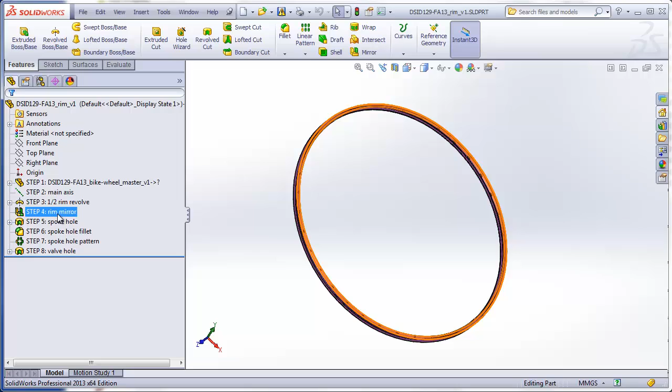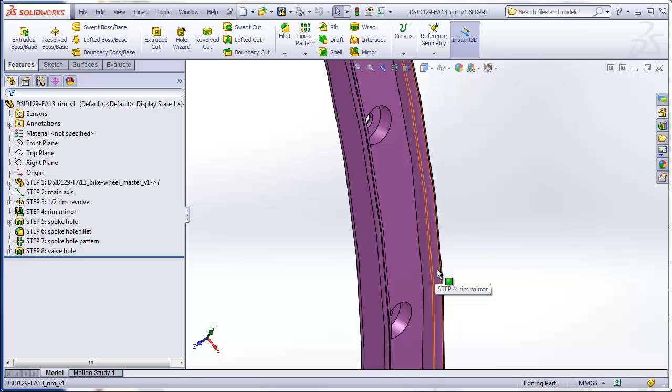The rim is just a revolve hoop that has a hole or series of holes in it, one for each spoke that will be going into the wheel assembly. It also has some details on the rim that capture or clinch the tire onto the rim so that it doesn't easily come off.

Taking a look at the rim in the wheel assembly, the spokes are evenly spaced all around the perimeter of the rim, and there are as many holes in the rim as there are in the 2 flanges on the hub. This example here shows 36 spokes total, so there are 36 holes in the rim, and we also have a hole in the rim to allow the valve stem to pass through.

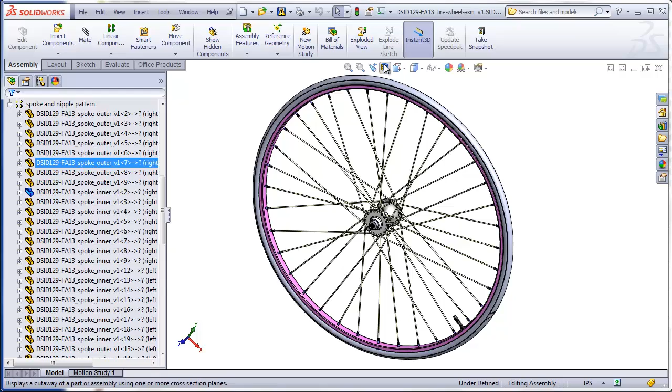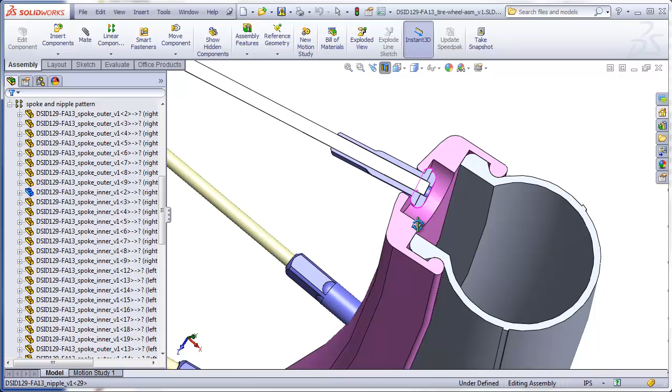If we take a cross section of the assembly, you can see the cross section of the rim here in purple. This is the detail that clinches on to the tire. This is the hole in the rim that allows the spoke nut or nipple to pass through, and this is what anchors the spoke into the rim. Then we have a slightly bigger hole which is used to create clearance for the anchor end of the nipple.

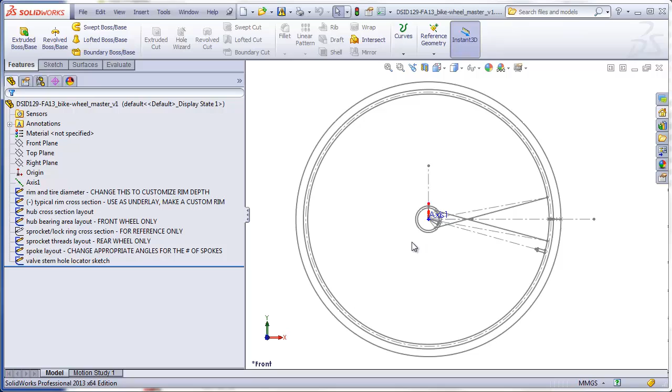Even though you are going to be designing a custom rim, one set of features you will not be altering are these details that clinch onto the tire and this back wall that the tire seats against. You are going to be building this model using the master model technique, and you will be using the same master model that you use for your other parts such as the hub and the axle. Before you started this process, you should have decided how many spokes were going to be in your wheel and what type of rim you were going to have.

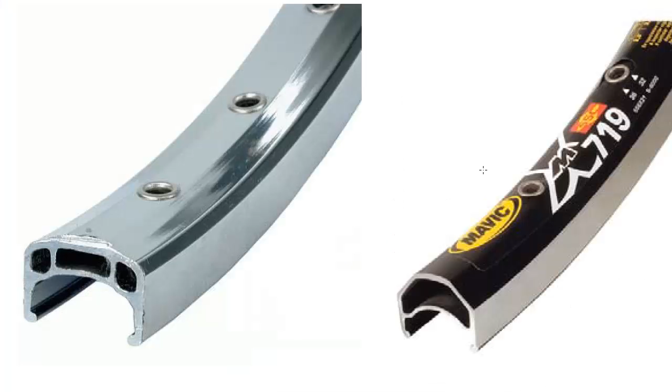Traditional older bike rims have a very boxy shape like this, or perhaps like this, and they are only about 11 or 12 millimeters tall in this dimension, perhaps 15 at the most. They also have a double wall section, as you see here and here. When we model our rim, we're just going to leave this filled in as a very thick wall.

The newer, more aerodynamic rims tend to have a deeper cross section, as much as 20 to 40 millimeters deep, and have an airfoil shaped cross section. Quite often, even though they have a curved airfoil cross section in this area, they will have vertical walls here and here where the brakes can engage. Often there's a little step right here to differentiate the area where the brakes engage, and the nice area here which is often anodized with some type of color.

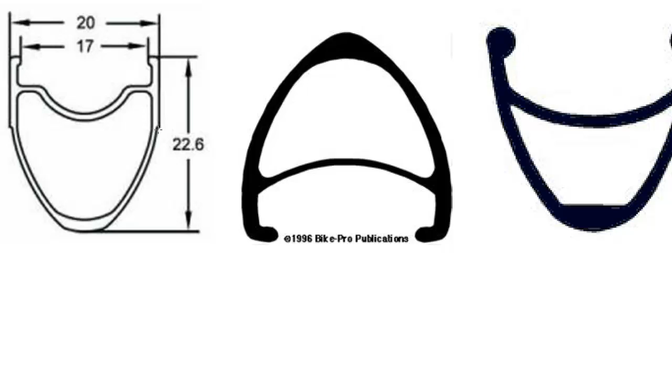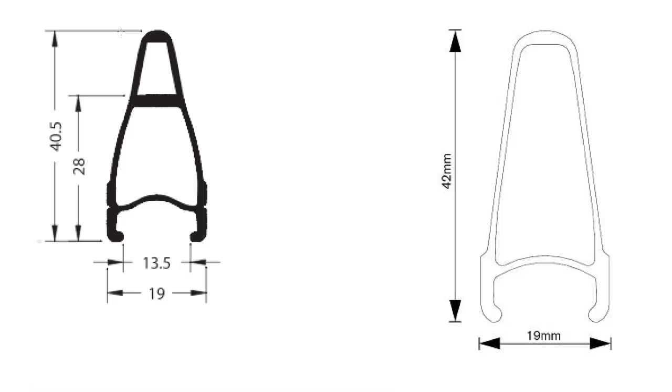At the extreme end of the range are arrow-shaped rims that have a 40 to 60 millimeter depth and get very narrow and tapered at the end. And again, you see that these often have flat sides for the brakes. Although I've seen ones that are 60, I think 40 would probably be the more practical limit for this project. Typically, the deeper the cross-section of the rim, the fewer the spokes that you need, because the rim becomes very stiff as it becomes very deep. However, for this project, the way I've constructed the models, 24 spokes is the fewest that we can use.

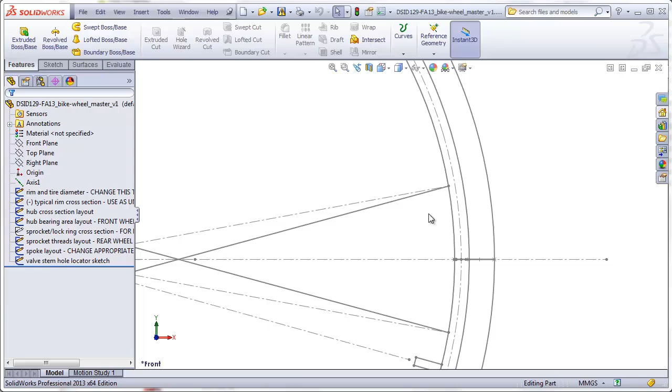Now, getting back to our master model, you have to have decided ahead of time whether you want a rim with boxy proportions, which are the dimensions represented in your current master model, or if you want a deeper aerodynamic rim. If you want a deeper aerodynamic rim, you want to go to the rim and tire diameter sketch and edit that, and change this rim depth, which is currently at 11 millimeters. I'm going to change my rim depth to about 35 millimeters. We can see how deep that rim is now compared to the tire.

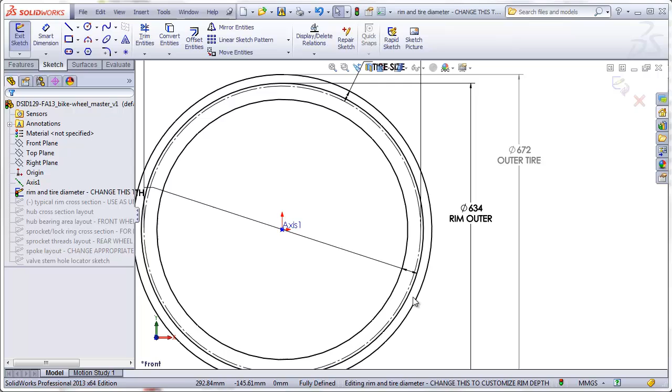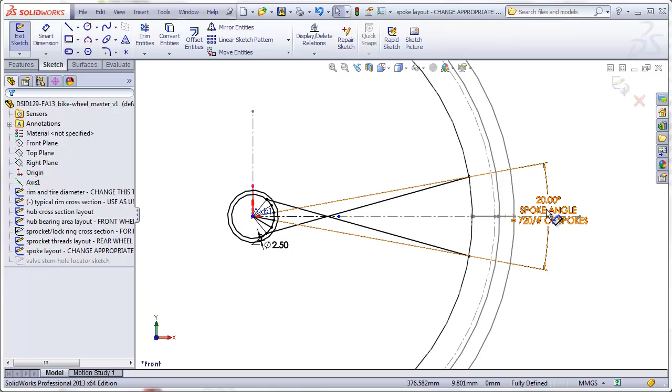And because I've got a deeper rim, I think I'll have fewer spokes as well. So I want to go into the spoke layout sketch and edit that, and I need to change this spoke angle. The spoke angle is equal to 720 divided by the total number of spokes. Editing this dimension, I'll type in 720 divided by 24 spokes. We see the spokes spread out quite a bit. And now I have a master model that's ready to be used in my rim.

If you already made some other parts for the wheel, such as the hub, you should have gone through this process first before making those parts, because that will affect the number of holes in the hub flanges. The next thing to do is create a new part.

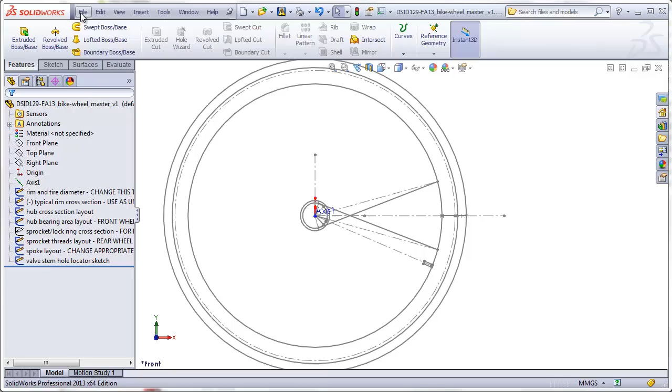And we might as well save this right now. Call this rim. And our first step in the process is to say insert part. We have to browse to our master file, which we find here. Open. Make sure that unabsorbed sketches is checked and check our green check mark.

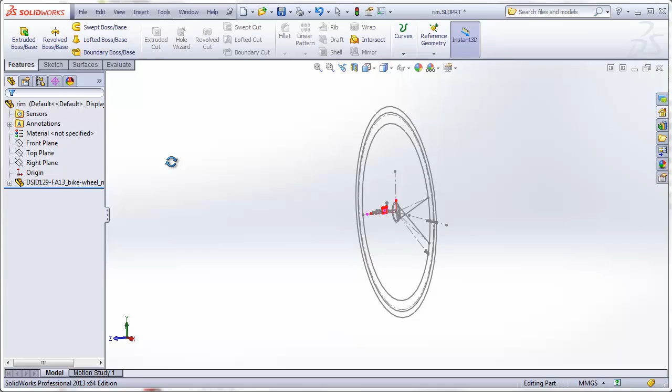And here we see our master file. We see that the rim depth has been updated on it. For step 2, I'm going to create a convenient axis that can be used for revolving. I'm going to have that go through the intersection of the top plane and the right plane.

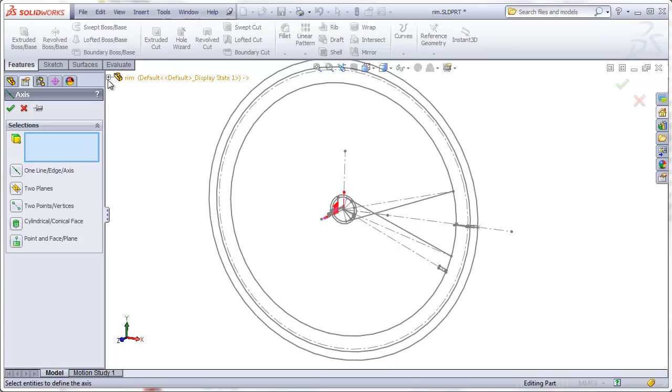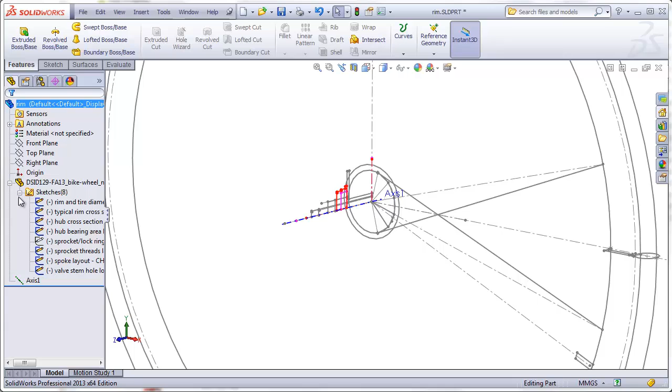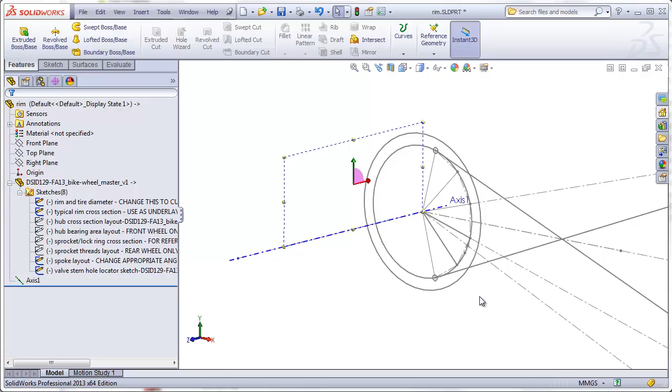And before I go any further, I'm going to get rid of some of the sketches that are not necessary to make this part. Clicking on the plus sign here, opening up the folder for my sketches. I don't need to have the hub cross section, the hub bearing area, the sprocket layout. That leaves me just 4 sketches that are related to the creation of the rim.

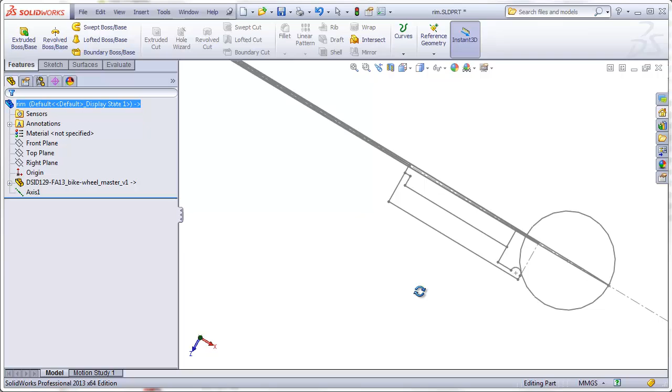Next step now is going to be to create 1/2 of the rim itself. Zooming in here, we see that when we changed the sketch for the depth of the rim, it automatically also updated the sketch that represents the cross section of the rim. So creating on our top plane a new sketch.

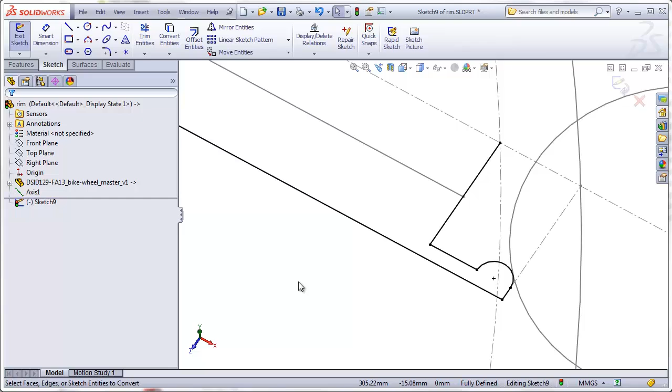I'm going to copy the details that must be in our sketch cross section, and these will be the details that clench the tire onto the rim. So using convert entities, I'll copy these items. And going up here, this is where the innermost part of the rim is located. The spoke passes through here. I'm going to copy this line as well.

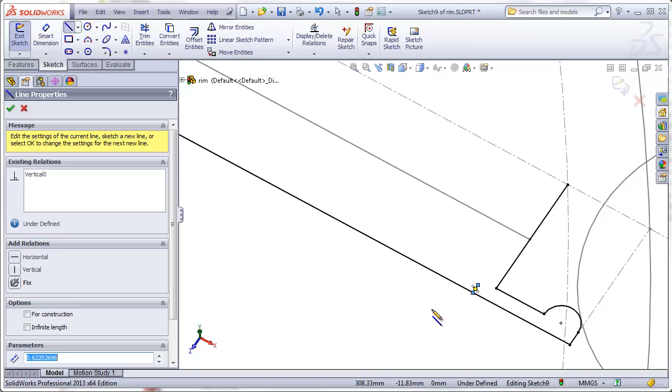But I want to make a more aerodynamic shaped rim. I want to put a little step here like you saw on the other examples, and then have this sort of arrow shape kind of coming up like this and wrapping around. So I'm going to add another line here. And add a spline. And I'll stop it right about here.

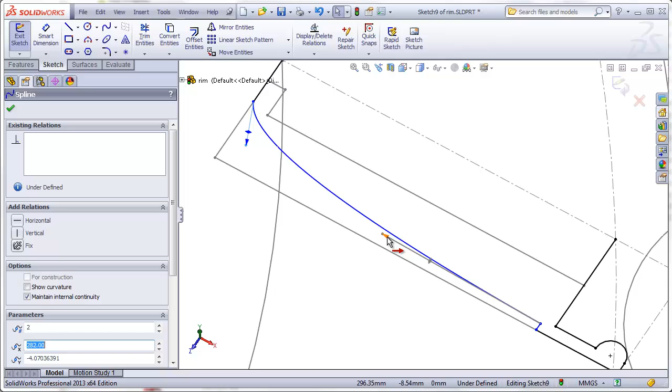Trim away the excess. And then start playing around with the spline here. I think I'll make this a horizontal relation. The step only needs to be about 1/2 millimeter at the most. I'll add a dimension here of about 10 millimeters, somewhat arbitrary.

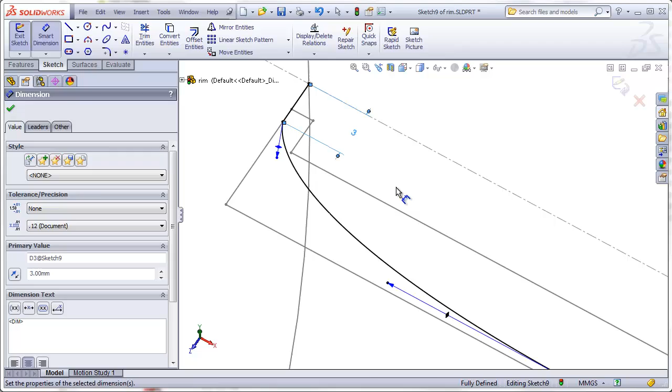And I want to have a little bit of a flat area here so that that hole passing through has a flat section to go through. So I'll make this about 3 millimeters, and I'll make this a vertical relation. Let's take a look at that directly. There's my aerodynamic shaped rim. I can maybe make this 2.

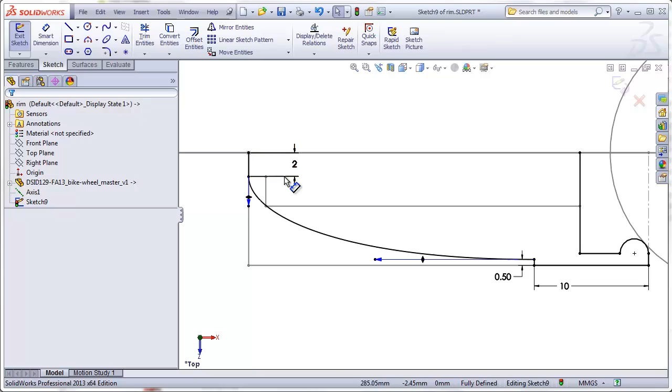This is the larger hole that's going to be going through to anchor the back of the spoke nut or nipple. So we want to make sure that this does not cut through. Otherwise, we need to make this hole go a little bit deeper, which might be acceptable. I'll bring this to here.

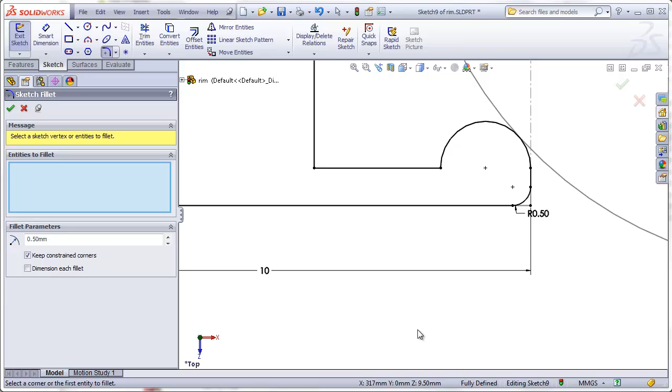And finally, I think I'll add a little fillet to this corner. That's too big, so we'll make that about 1/2 millimeter. That looks good. So this is the section we're going to revolve. There's one last thing we need, which is a line going across here to finish this closed off area.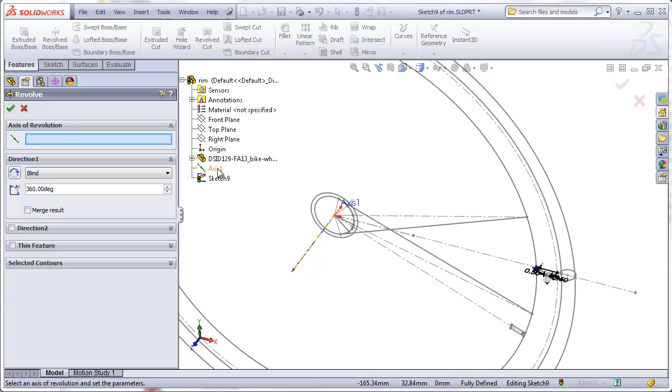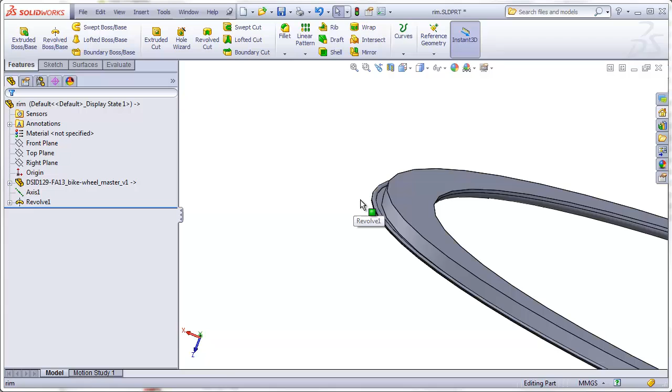So now we can finish the rim just using the revolved boss/base command. Our axis of revolution will be the axis we made in step 1. Let me hide everything for a moment, and here we have 1/2 of the rim that includes the clinching detail that grabs onto the tire, and this is the back wall that the tire seats against.

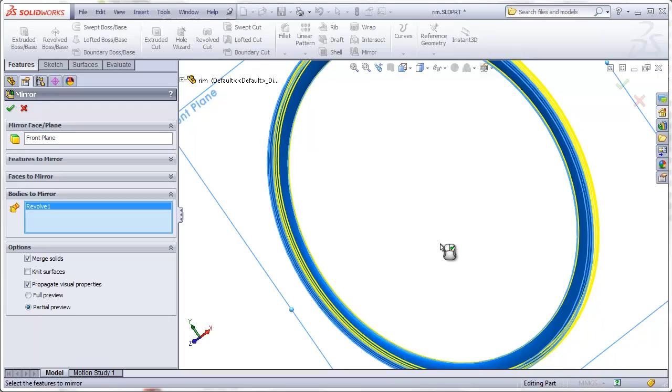Our next step is to mirror this to make the entire rim. Using our front plane as the mirror surface, we might want to use the bodies to mirror instead of features to mirror option. Clicking on that body, making sure merge solids is checked. Complete. Now we've got the entire rim.

The next step is to put in the first spoke hole. Turning my sketches back on, we're going to use the sketch for this upper spoke to drive the location of the spoke hole. On the front plane, make a new sketch. I'm going to draw a center line.

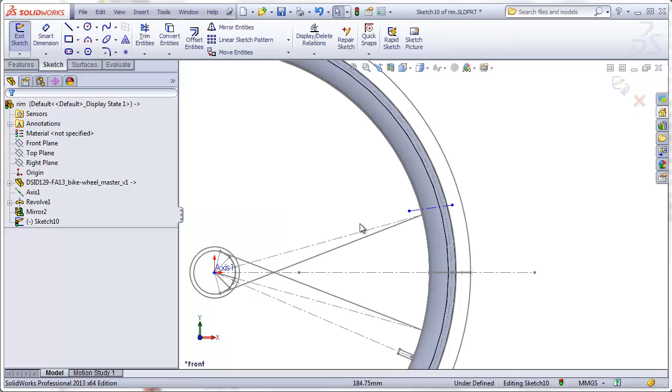Instead of making it collinear with the spoke, I'm going to make it collinear with this line that starts at the end of the spoke but goes through the center of the hub. This hole then will go normal or perpendicular to the face of the rim. Collinear. We're going to use this axis to revolve a cut hole that will clear both the nipple in this area and the anchor for the nipple in this area.

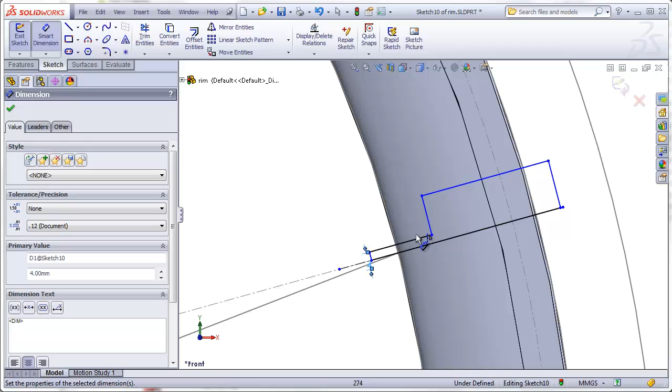The cross section for that is going to look like this. Making these lines parallel. And these perpendicular. What I want to do is revolve a hole that's big enough for the nipple in this area, which has to be about a 4 millimeter diameter hole. Notice how I'm dragging to the outside here to give me a diameter dimension. And the area that's going to clear the anchor for the nipple needs to be about 9 millimeters in diameter.

We can just drag the ends of these well outboard of the rim, but we do need to dimension this location here. So I'm going to dimension from this endpoint that's in the sketch. I'm going to make this about 1.5 millimeters. Depending on the shape of your rim in this area, this might be too thin an area and this portion will cut through the rim. So you can make this section a little thicker if you need to, but not too thick, because the spoke nipple sits against this surface in the rim. If this is too thick, the spoke nipple will be pulled down into the rim, leaving very little of it above the rim to screw onto the spoke.

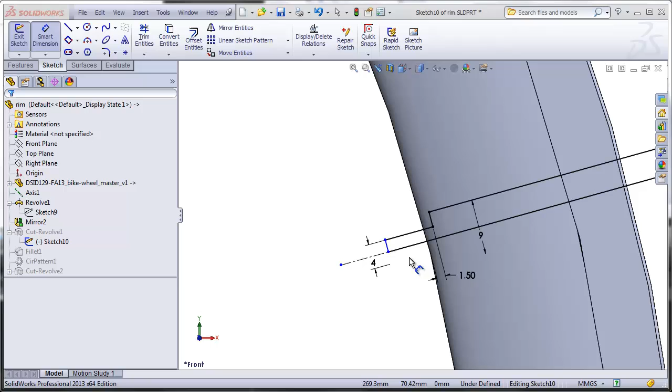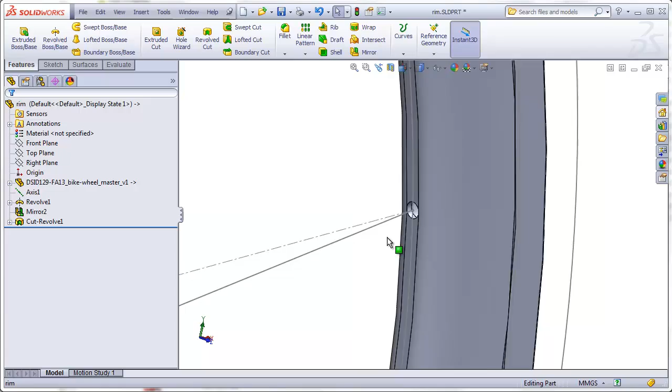Now ready to revolve this cut. And because I already have an axis in the sketch, it automatically uses that axis to revolve about. Here's my hole for the nipple. Here's the hole that clears the anchor on the back side of the nipple. Hide our sketches again. Zoom in on that hole. I'm going to add a little fillet to that hole if I can, about 0.5 millimeter.

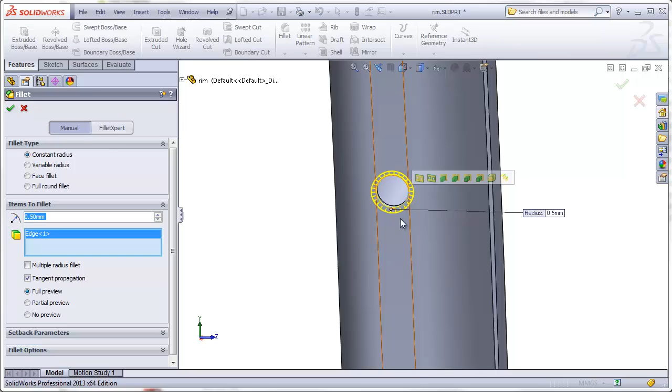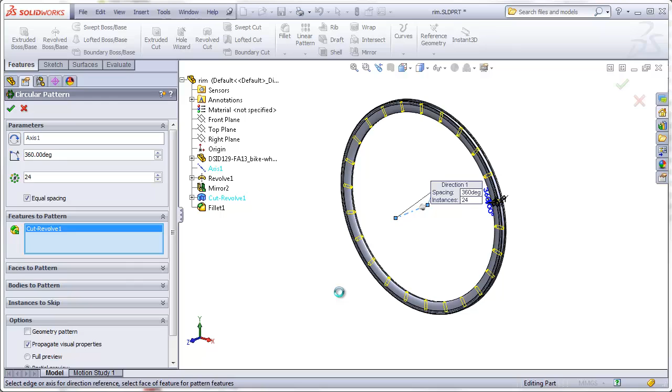Now I'm ready to pattern all of my holes. Remember, I decided I wanted 24 holes. I'm going to pattern that around axis 1. And the features I'm going to pattern are going to be the hole and the fillet, and I need 24 total. But you'll notice that I forgot to click on the fillet, so let me add that to the feature. Here we have the hole plus the fillet applied to every single hole.

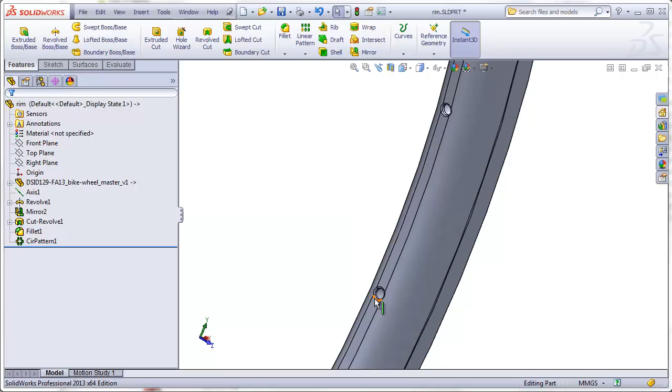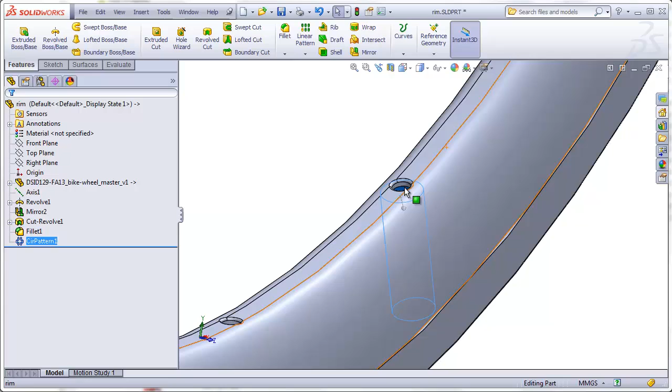And because the rim is narrow at the top where the hole passes through, you can see that the hole sort of just wraps around the edge a little bit. If you have a very pointed rim in this area, you'll notice the hole wrapping around the edge even more. Again, be careful when you do this cut that it doesn't break through to the side of the rim. If that happens, you might need to make this section a little bit thicker. But again, not too thick, otherwise the spoke nut or nipple that anchors the spoke is going to be pulled way down into the hole when you make your final assembly. So here we have the hole, here we have the shape of our rim, and here's that flat section for the brakes.

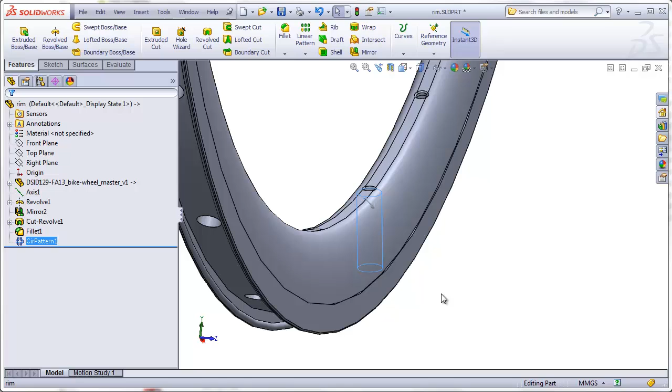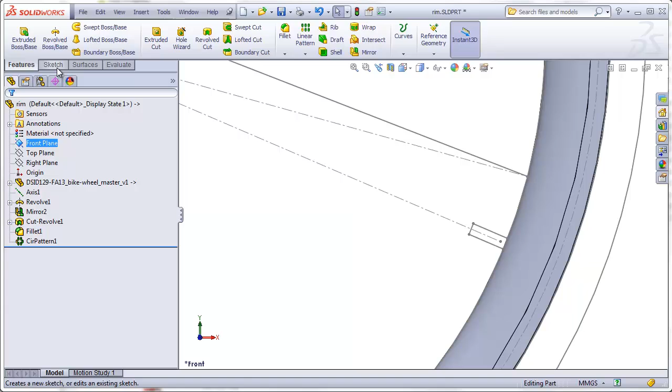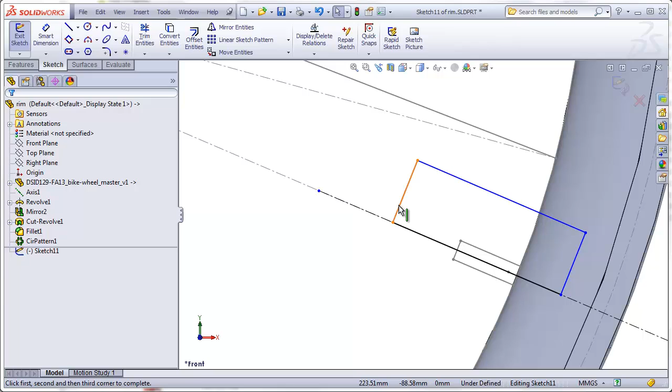Our final step now is simply to add the hole that the valve stem will pass through, and we have a convenient sketch to help us get that into the right position so it's properly between the spokes. This sketch here gives us the location of the valve stem. And on the front plane, we'll make a new sketch. We'll make a center line, make it collinear to the center line. Then we'll draw a 3-point rectangle, which automatically gives us these sides being perpendicular, but also allows us to tilt the rectangle on angle.

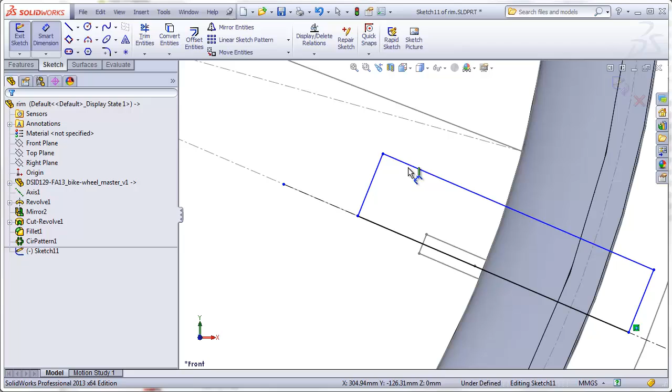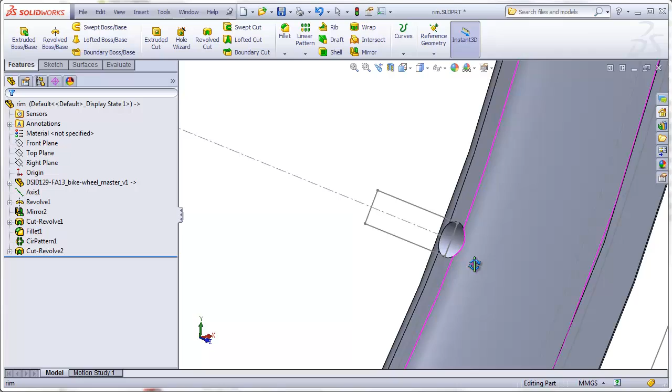I'm going to drag the rectangle out so that it's passing completely through the rim, and I happen to know that the proper diameter for this hole has to be 1/4 inch, which is equal to 6.35 millimeters. So measuring from here to my center line, dragging out to the side or underneath, 6.35. That's going to be revolved to make a hole cut for our stem. Revolve cut, and here's our hole for the stem. You can see how that just barely wraps around the sides of the rim. And that concludes the creation of the rim for Project 6.